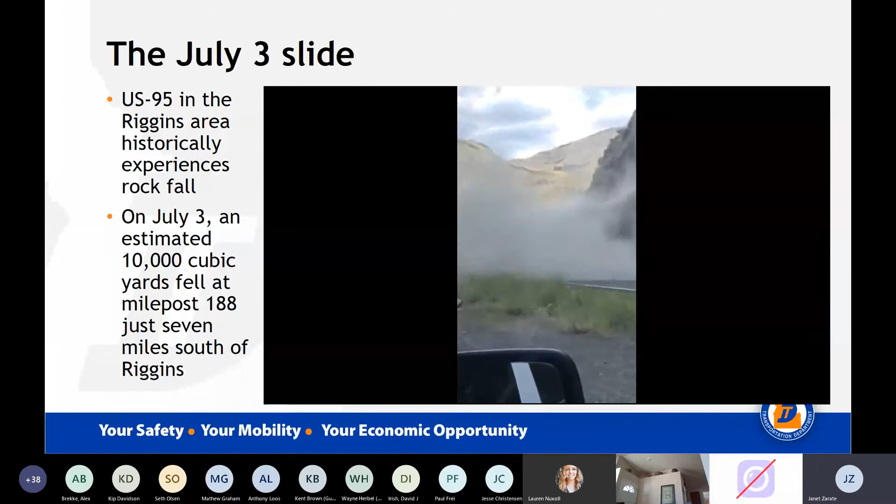Oh my gosh. Jesus. Oh crap. This is not going to come.

That's the understatement of the year there. So thankfully, on the July 3rd slide, and we'll talk about the July 10th as well, nobody was hurt, and that's pretty incredible footage of that slide.

Thanks, Janet. So what we have here is a metamorphic intrusion, basically composed of a greenstone that is typically called serpentinite or serpentine type rock, and it's interspersed with about 4 shear zones. Along those shear zones, you'll find a schistose type rock. And this rock outcrop is about 250 feet high, about 800 feet long.

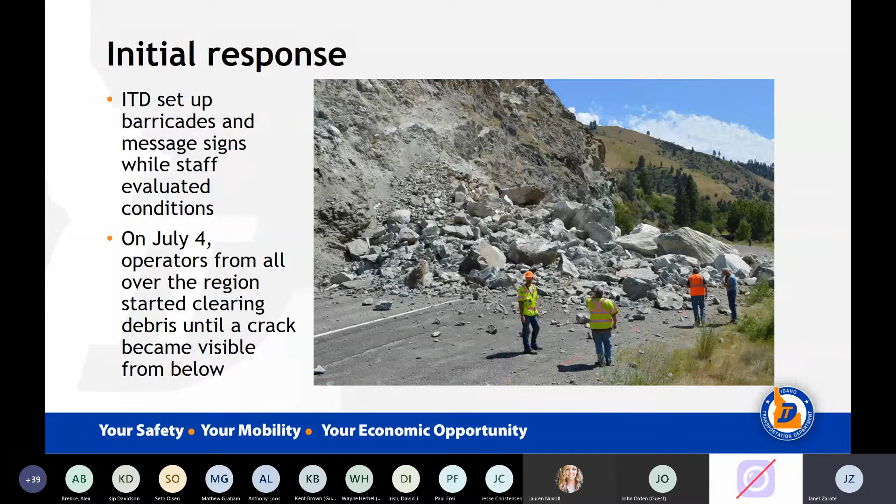We also faced the challenge of rounding up folks over 4th of July weekend to get operators out all over the region to start looking at the debris and formulating a plan. But one thing that we had to do before we could start the work is make sure that we could do it safely. And that was critical, getting McMillen Jacobs out to be able to assess the slope. We also mobilized David Evans and Associates to put targets on the slope and begin a monitoring regimen. We had ITD spotters out 24/7 to watch the slope and make sure once we got operators lined up and construction happening that we could do it safely.

So here's some pictures of that work. Once McMillen had assessed the slope, we brought in 4 Connex containers that were 40 feet long. We used those to create a protective berm and opened a shoofly that was just 1 lane. It was ready on July 5th, but we still were getting comfortable with the slope, assessing the information that we had available. And so we waited to open to just one-way traffic during daylight hours until July 8th. And then as Bill hinted at, we started to see some movement. So we closed the road on July 9th, but we'll talk a little bit more about that later.

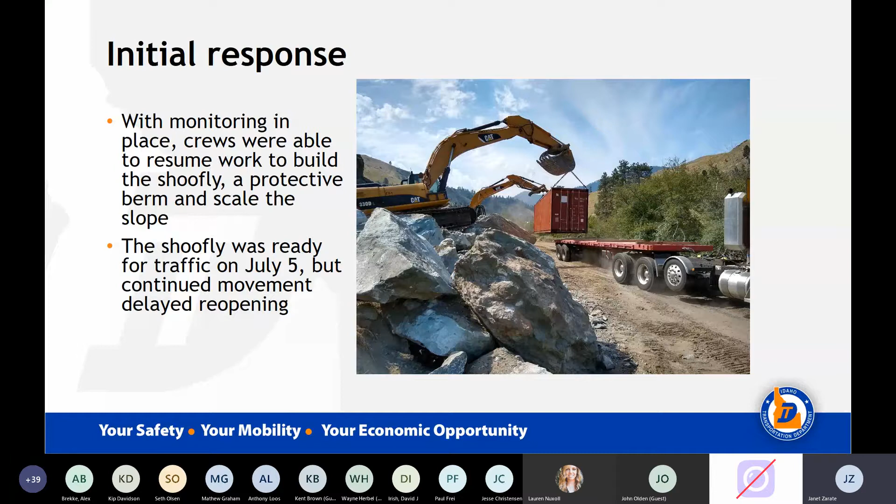So initially on July 5, actually Brian had a crew that was already on contract, TripTech, to come out and do some scaling. So we got on the slope with TripTech on July 5, or correction, July 6, and started evaluating the slope. So basically what we're doing is safety scaling, getting some of the major loose boulders off of there so we can safely evaluate the slope and also get traffic moving.

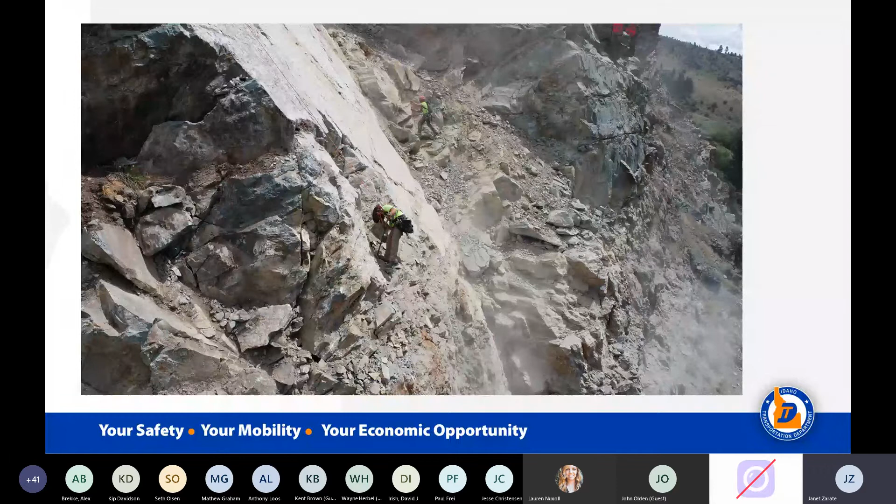So on July 6th when we got out there, you can see they got the Connex container set up, and they've got that shoofly operating. And one of the key things is when we got out there, I had ITD start opening up the ditch between the toe of the slope and that berm so we could have a bigger catchment zone. And you can see Jamie and I up there standing on the footwall below the tension fracture. Obviously we're on ropes, so it's kind of spooky out there still. We're looking at that tension fracture. Right there, it's about 5 feet wide.

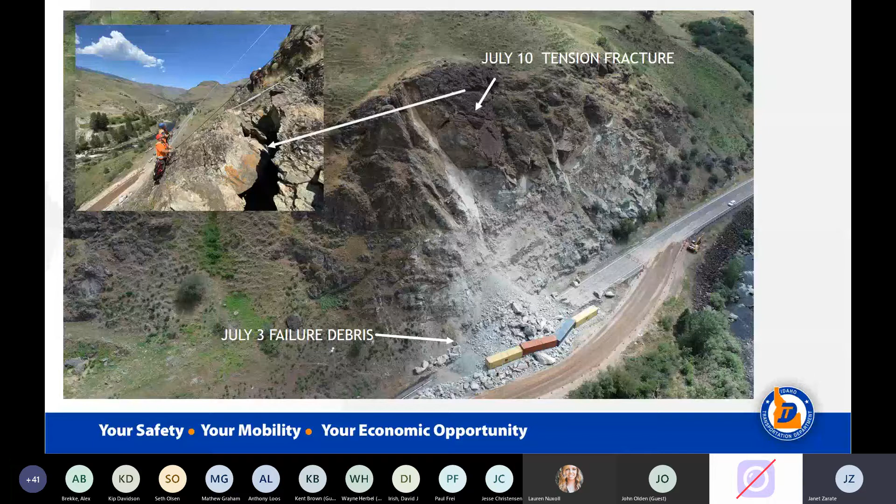What happened was during that period of July 8th, we got traffic moving. We started seeing additional increase in movement on the surveyed targets, and also the tape broke on the extensometers. I had them re-tape the thing, and then I get a call that evening that it broke again. And so after discussion with Brian and Doral, I said we need to close the road. So you sometimes wonder whether you're going to be a goat or a hero when you close a major artery. Fortunately, after we closed the road, it did fail on July 10, and fortunately nobody was hurt.

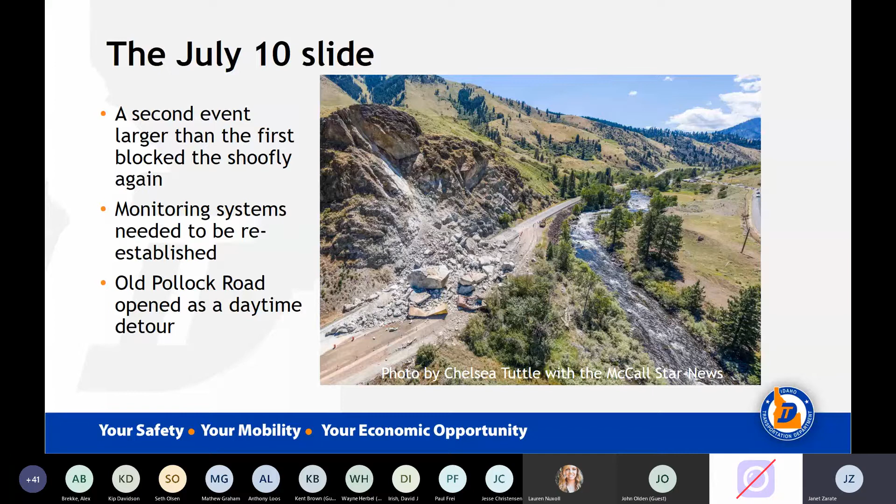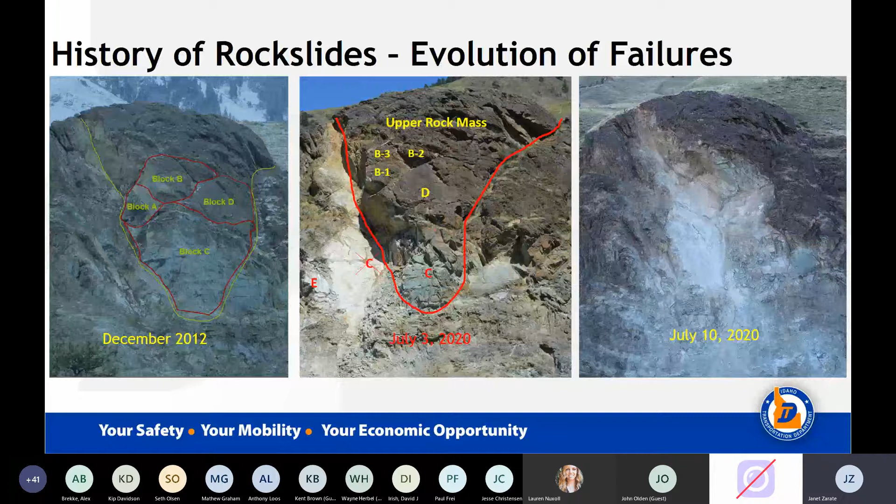But you'll notice those Connex containers look like tin cans. You just kind of mashed them with your foot. Now, one big block is probably block D that we labeled earlier up there, and block B actually broke down into 3, but it broke all the way along that tension fracture. You see that PVC extensometer above B3 is the one that broke twice on us. That's when we decided it's time to stop traffic and get this figured out.

So here's another view of that July 10th slide. The locals called this house rock because it was the size of a house. It was about 42 feet wide, 50 feet long, and an average of 23 feet tall. And the weight was about 3,500 tons. So we just knew it was going to be a significant effort to clear the road and reopen the shoofly.

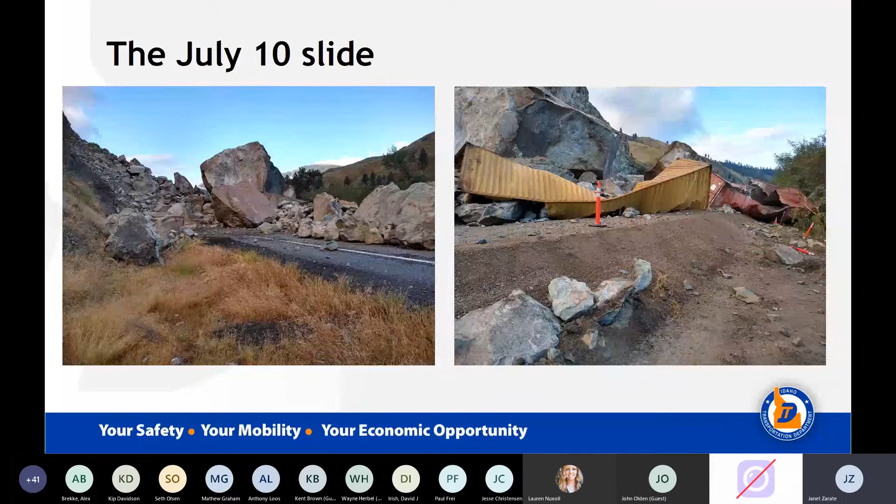Yeah, that big block you see, house block, is actually probably block D. And you look at those Conex containers, just mashed them like some big giant walked over them.

So another unique thing about the project is typically you don't look for a detour because of a rock slide and address a landslide, but that's what we had to do here on Pollock Road. And so Pollock Road had been closed for several years because of a landslide, and you can see in the picture below that's really not traversable.

And unfortunately, Google had this identified as a feasible detour. Thankfully, most folks in this area don't have reception, but we notified Google to take it down until we had made repairs and opened it officially as a detour on July 9th.

We worked with the local community because this is a quiet road that previously had been closed, that now was accommodating highway traffic. So it was opened only to daylight traffic, and we shifted those hours based on the needs of commuters and traffic demands in that area.

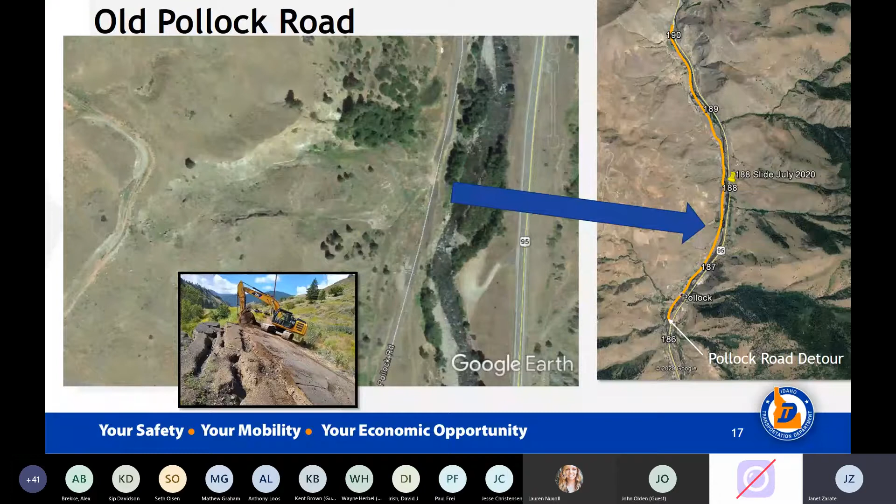So you can see the shoofly was open on July 27th. You might have seen blasting videos from clearing the rock and the debris. This time, instead of bringing in Conex containers, we built up a berm like Bill discussed before. This time we had a lot more material, so it was a lot bigger, and beefed up the shoofly so that it was able to accommodate 2-lane traffic.

At the beginning, while we were still developing and making sure that the slope was stable and had relaxed, we only opened it to daytime travel. And we'll talk about nighttime monitoring. One of the key things is that berm.

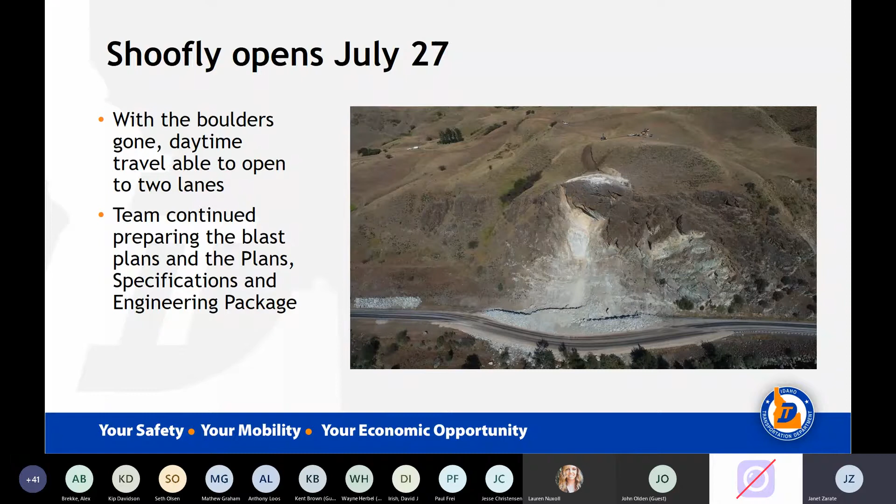So I had them working on both ends to increase the size of that berm and open up the catchment zone between the toe of the slope and that berm, because it was critical to catch a rock, not only when we were preparing to take that large rock mass out of the mouth of that chute, but eventually we're going to also be scaling that slope, and it works as a good method to capture that rock.

Now, what Janet was talking about, the big thing is we installed additional targets on the rock mass, but we also had monitoring 24/7, watching the slope. We moved all our survey points across the river so we could look right straight across at it out of harm's way. And at night, you say, well, what good is it watching at night?

Well, actually, with those lights, if you have any rockfall, it'll set up a dust storm and it'll look like a big cloud or starburst, and you can really see it. And also, it's quite eerie because you can hear the rock start to roll a little bit and such like this. So we had people sitting up there for the full night just watching this slope.

And we implemented an emergency protocol, and we had that in place earlier, but here's a good time to talk about it. Just so if our spotters saw anything at night, they could reach out to McMillen Jacobs folks and have them assess the slope. If it was critical to do an emergency closure, we had our traffic control company on call 24/7 to do that, put up a posting on 511. And so having all these safety measures in place just made it possible to open the highway back up.

So one of the key things is we have that large rock mass up there. That's 14,000 cubic yards, about 33,000 tons, basically. And we're going to be putting machinery on that outcrop. We're also going to be putting personnel. And so we were very concerned about monitoring movement.

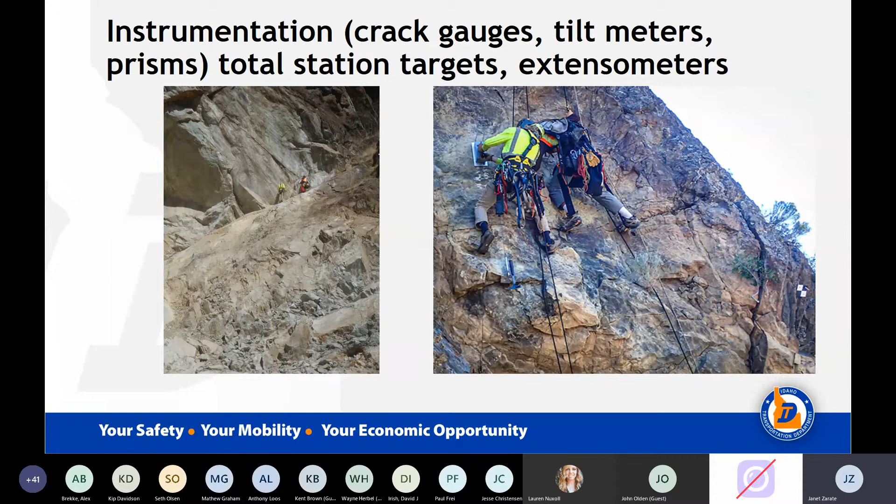And then we put additional targets, like you see on the right of that slide down there, that black and white, that's one of the targets that DA would shoot with their total station system. And we put new extensometers across some specific fractures that we were concerned about. The extensometers this time, I had them take a PVC pipe and then put another one inside of it. So the telescope, the one inside of it, would be painted red, and if it pulled out and we saw red, it meant stop and evaluate the slope. You could see that from across the site at our survey site.

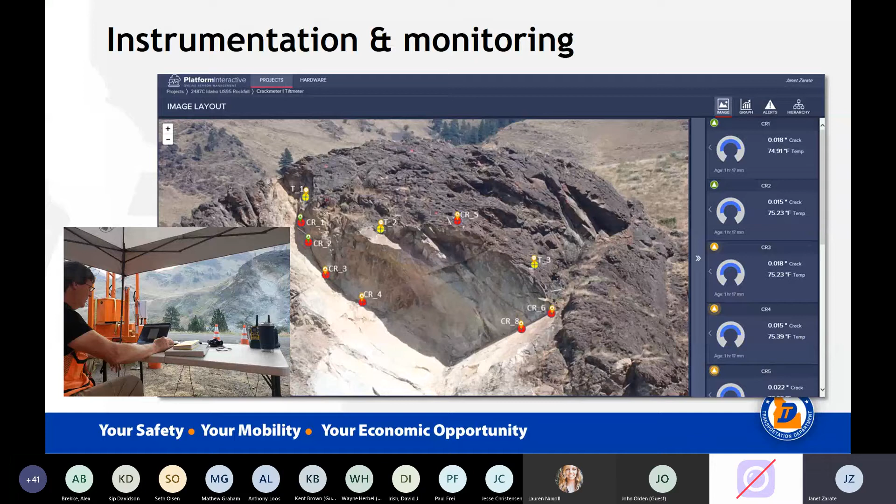And so every hour we'd go through all instruments. We'd check all physical surveying. We'd check the extensometers and stuff. And if we had anything that went astray on any of these, we'd immediately stop and evaluate the problem. The interesting thing is these would measure up to 1,000th of an inch, and you could watch the actual rock breathe during the day. As it got hot, you'd have changes in the movement of the extensometers and primarily in the tilt meters, and then they'd settle back down.

One of the key things was the communication, tying these into a cell phone. Now, Janet was able to get to Verizon. Verizon volunteered to bring out this repeater station on loan, with the understanding that we had some major fires going on in McCall and up in the Payette Wilderness area, and that it may be diverted to a fire. And so this was working great all the way up to about 24 hours before that shot. Jerry and I were talking with Janet and Doral on cell. All of a sudden, bloop, there it went, they moved the repeater. And so Jim Struthers used his ingenuity and was able to work with Superior, and we got on their system that controlled traffic lights, and we were back online in about 2 hours to continue the monitoring.

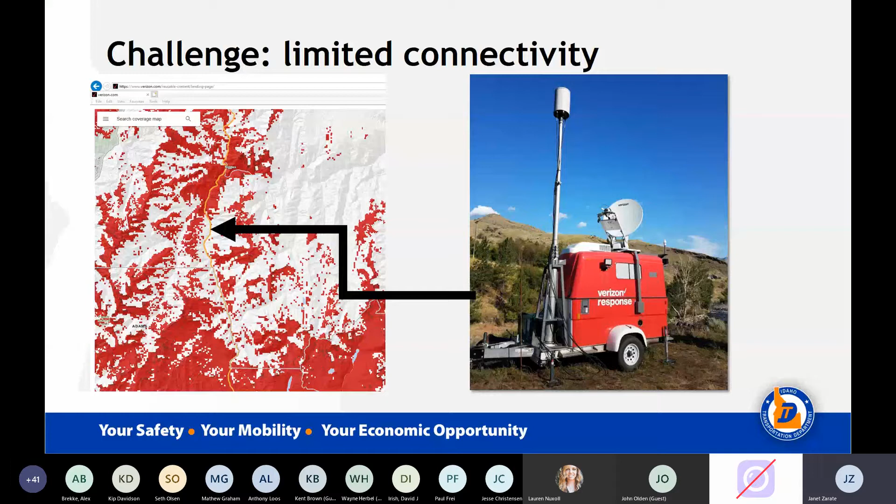Because the beauty of the telemetry, we could run this 24 hours through the night, whereas the total station was only daylight shots. And the nice thing too, for assurances and opening the road, whenever data wasn't received, the McMillen Jacobs crew would receive text message alerts notifying that there was a problem, that data wasn't being sent from the slope. So there were multiple security measures to make sure that we actively were monitoring the slope.

This is a picture from the top of the slide looking down on the drill rig. So alongside implementing all these safety protocols to successfully and safely do the work for the contract, we were putting together the plans, provisions and specifications for the slide mitigation project. So the PS&E package was ready for advertisement on July 24th. And just a reminder, the original slide occurred on July 3rd. So it's a pretty incredible time for the team to come together and put together a package for bid.

One of the key things to look at here, you'll notice we got 2 drill rigs sitting on the rock slope itself, on the mass, and we have the excavators carving a trail right now basically along where the tension fracture is. And so because of this, we were very concerned about movement with personnel and the rig sitting on there. And so this is the reason we spent $60,000 just in telemetry alone.

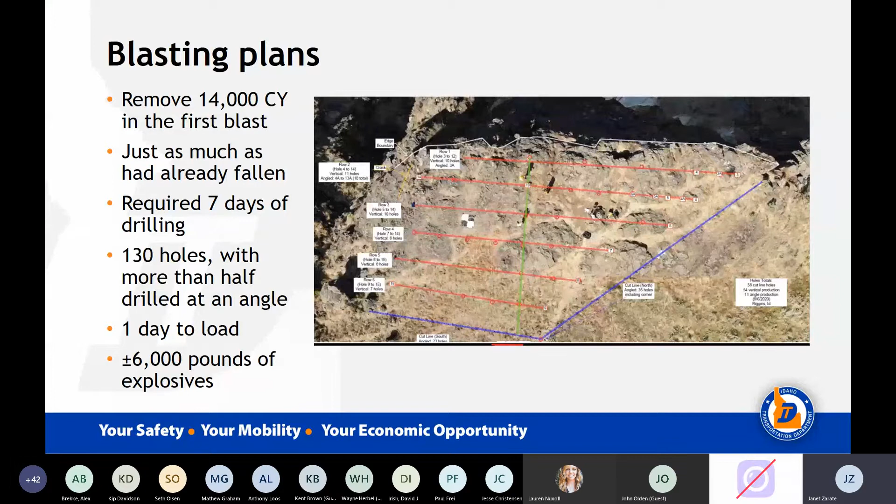So we had a crew on site drilling. We had some people from McMillen Jacobs up there monitoring and logging holes as they drilled, and we'd spend like 10 to 14 hours a day drilling these holes. But it was quite amazing. We got about 7,000 feet of hole drilled in about 7 days. It took a day to load, and we loaded about 6,000 pounds of explosive.

All right, just a typical cross section on the left, the typical blast hole. You'll notice we got a primer in the bottom, primer in the middle. We wanted to make sure that this thing shot, and so we loaded the hole based on Jerry and I looking at it. We talk back and forth. So, okay, let's load it this way.

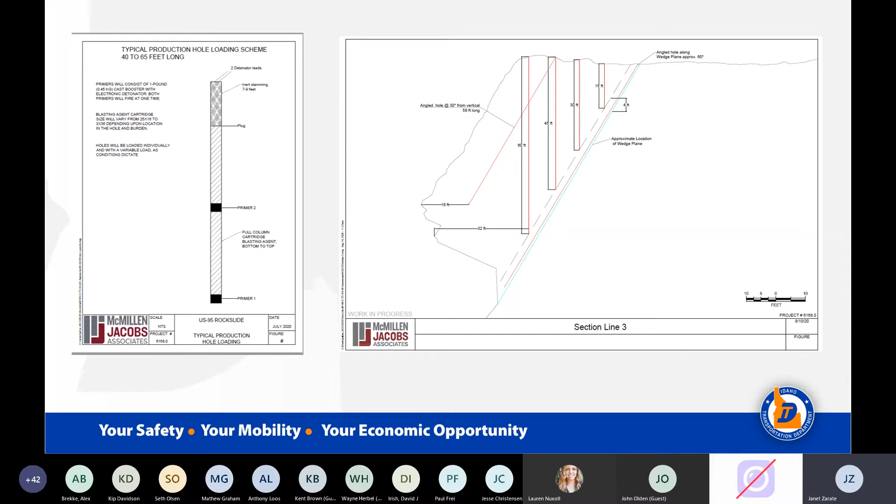On the right, you'll see the typical production holes. Those are subvertical holes, and then you'll see the trim blast hole or the cushion blast hole that's sub-parallel to the slide plane. So what we wanted to do is be able to shoot and lift it off of the rock mass or that slide plane, let it slide down into that catchment zone that we have created at the bottom of the slope.

So on your left, you'll see we're drilling that 60-degree cushion blast hole. Now this is a difficult hole not only to drill, but it's really difficult to load too and such. On the right, you see Jerry and crew loading holes. You'll notice Jerry and Ethan off, we're right on the edge there. It's about 250 feet down to the floor.

What we did, we had two crews loading, one loading the production holes. You can see Alexis there logging those holes. Carol Ravano logging holes for the cushion blast that's just off the picture behind us. After all this talk about blasting, we should go ahead and watch the video.

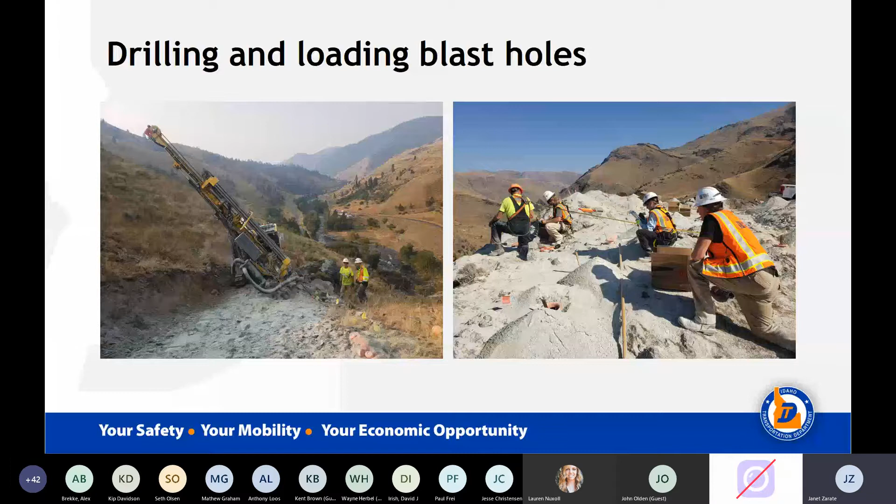So you can see the berm was in place to help contain material. DEA was out, and McMillen Jacobs took drone footage. So this is from DEA.

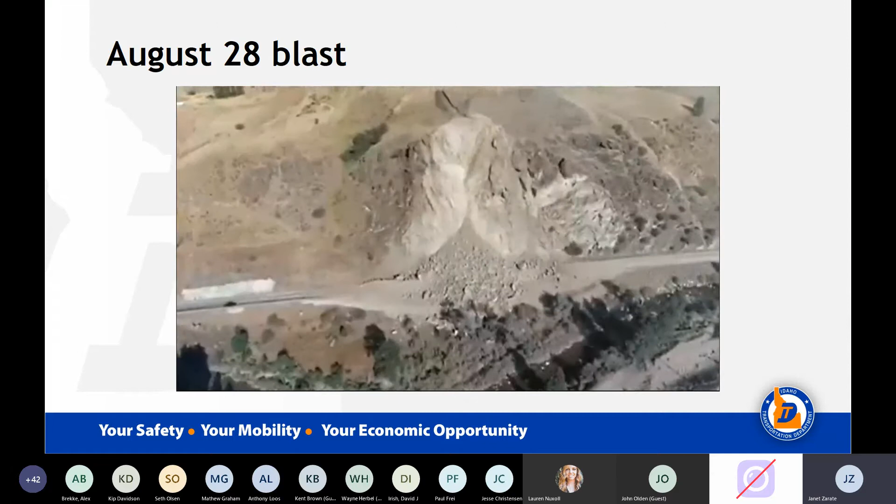One thing to keep in mind and keep fresh in your memory is the dust in that video. We'll talk a little bit more about air monitoring later on in the presentation. This project was unique because it had a $10,000 a day incentive to open 95. And Scarsella was able to open the road in 5 days in time for Labor Day weekend, so they didn't have any impacts to traffic over that weekend.

So first of all, this was a very technical shot, and thanks to Jerry's guidance on there, we had no rocks in the river; they landed in the ditch and on the shoe fly itself. In fact, we got very few rocks even in those tree lines there. So it was a very, very technical shot, but it was basically a perfect shot too.

So what happens now is after a shot like this, you've got to let the rock relax because the rock has been under a lot of stress, and so you just relieve the stress. So we let it rest and relax for at least 2 days. Once the 2 days were up, we got scaling crews immediately in. Now it was Rock Supremacy with Scarsella Brothers up on the slope.

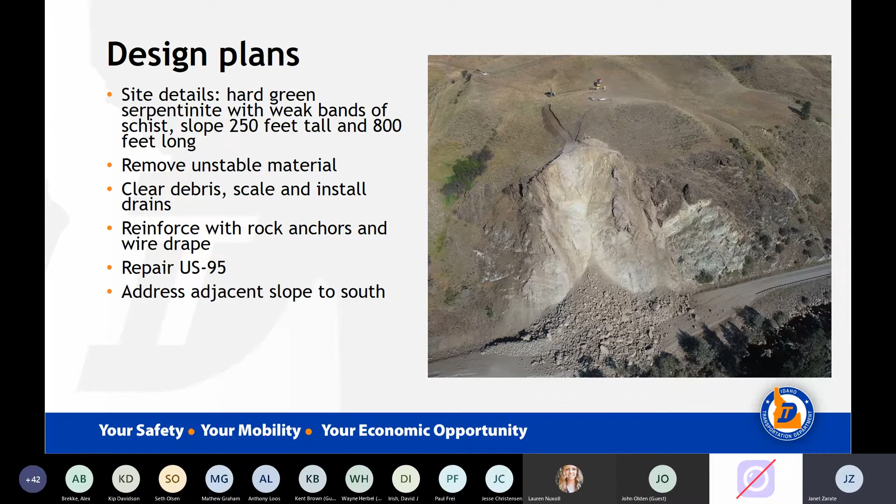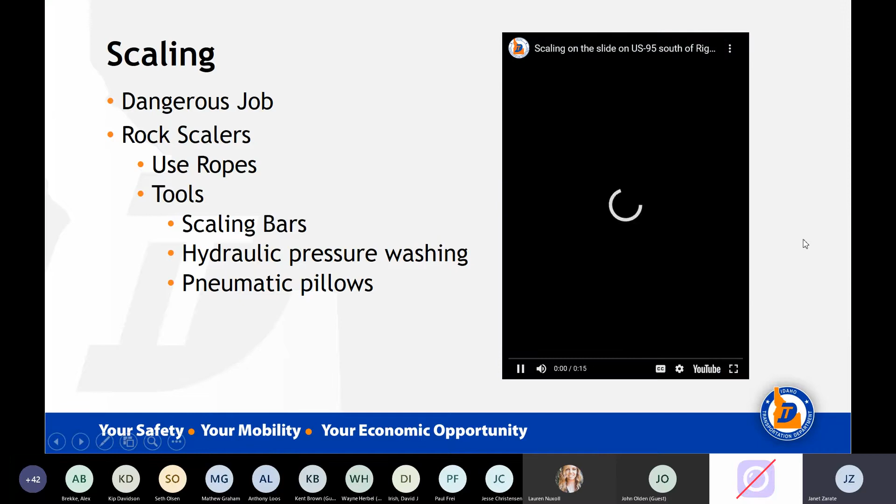Now, scaling is inherently a very dangerous job. And these scalers typically are on ropes, using scaling bars or pressure washing or pneumatic pillows to bring the blocks down. That's Ethan Guzik there. He's watching one of their blocks come down.

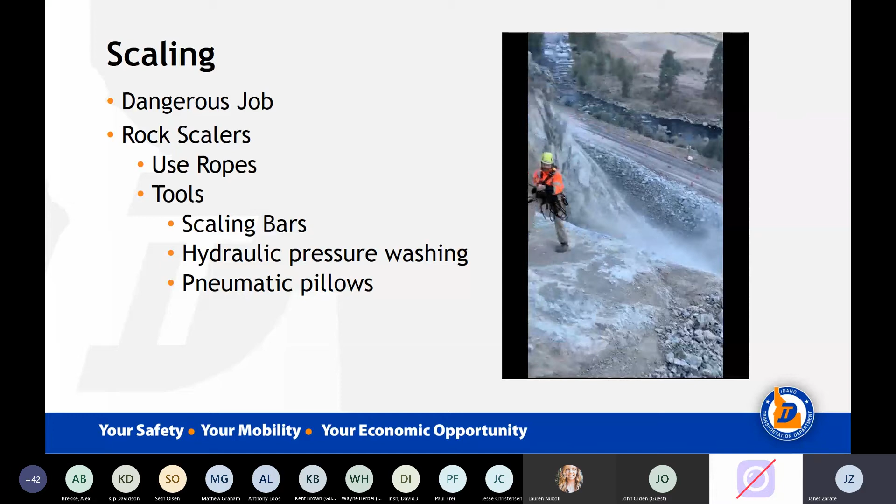You'll see that that ditch works perfectly. Just about 98% of our rocks that are kicked down when we're scaling stayed within that catchment ditch. And so that's what's really important, to have a good catchment ditch at the toe of your slope.

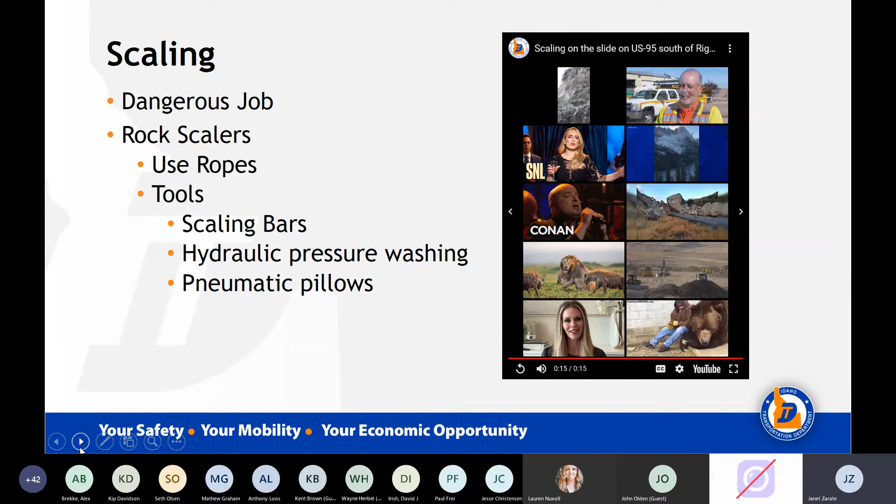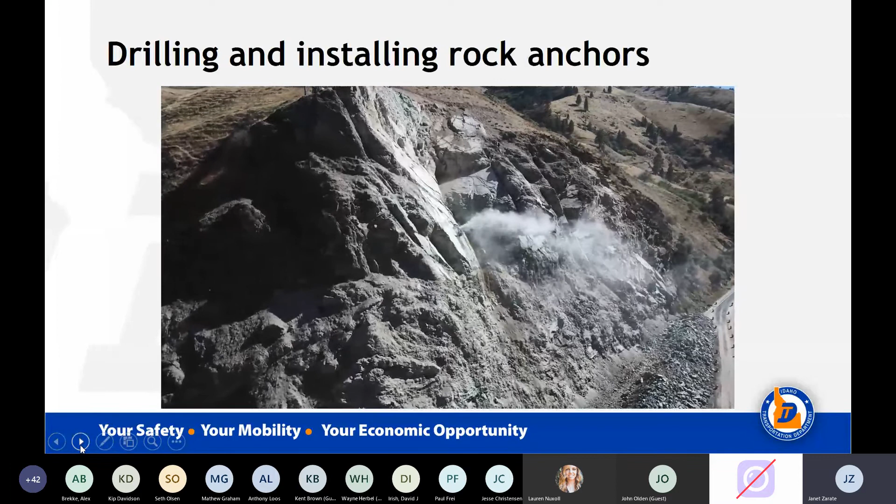Now, the drilling is done by a wagon drill. These wagon drills are lowered on cables, and you'll have an operator, a driller and then an assistant that's actually drilling the holes. So we're drilling the holes on the left. On the right, we're actually installing the rock anchors.

These rock anchors, number 10 bar, weigh about 100 pounds a piece because they're about 20 feet long. Incidentally, we actually put in some 30-footers, so you can imagine the angst trying to get a 30-foot down there. Fortunately, we used a coupler to do that. But it's a very dangerous job hanging on these wagon drills. But that's the way you do it.

So where are we? So far, we're done scaling now. We've scaled about 1,000 yards of rock. We've actually drilled and installed over a mile of rock anchors. This includes the dowels, some rock bolts, and then also rock anchors for the upcoming drapes and TECCO mesh.

We've installed about 300 linear feet of drains so we can reduce that hydrostatic pressure behind the main block. We're getting prepared to fly a mission with a helicopter to install about 60,000 square feet of wire drape on the south end. And right now we're installing about 2,000 square feet of TECCO mesh at the mouth of that chute.

And the reason we're doing that is we discovered at the top we had these fluvial boulders, or alluvial river type boulders, that apparently were laid down many years ago when the river was higher in the valley. So we've got erosion, say 250 feet. And so this is an ancestral type riverbed. And these rocks are so rounded and they just go down like bowling balls down the slope.

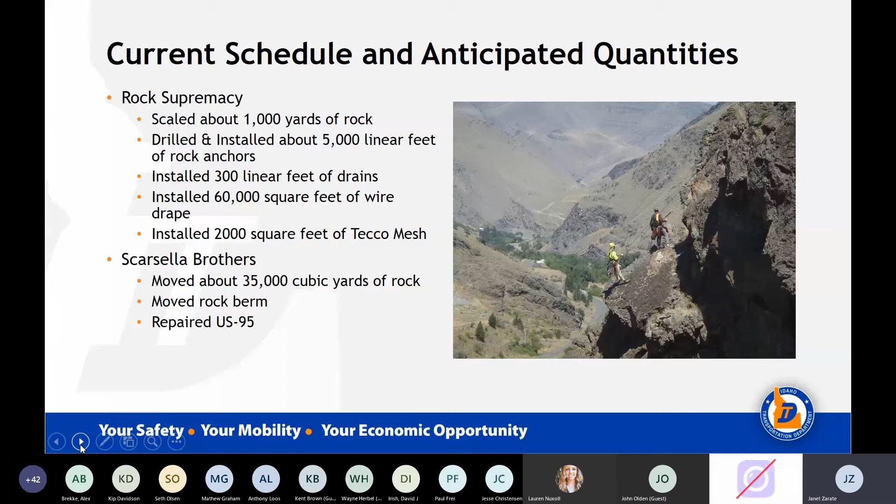So one thing I wanted to take the opportunity to raise awareness about that we encountered on this project is naturally occurring asbestos. Cody Stevens is a PhD student at the University of Idaho. He shared his thesis with us. He saw the slide on the news and let us know that his analysis had shown that there was naturally occurring asbestos as part of the rock of the slide.

And most folks, when they hear asbestos, they think of building materials. And there are some ways that they're similar, but there are some very key ways that it's different, that you need subject matter experts in the mineral form of asbestos, which we'll talk about a little bit more later on. But one thing I want you to keep in mind is that OSHA requirements apply for naturally occurring asbestos and projects in construction as well.

And they have 3 different classifications: none detected, less than 1%, and greater than 1%. And the key differences between those classifications are the extent of your monitoring, your training program, and how you can dispose of the material.

You know, one of the key things to understand, asbestos is just a general term. It applies to a lot of fiber type minerals. Typically, in this case, in naturally occurring asbestos, we're dealing with actinolite or tremolite. And with the serpentinite, that greenstone that Jim was sampling, that's typically actinolite.

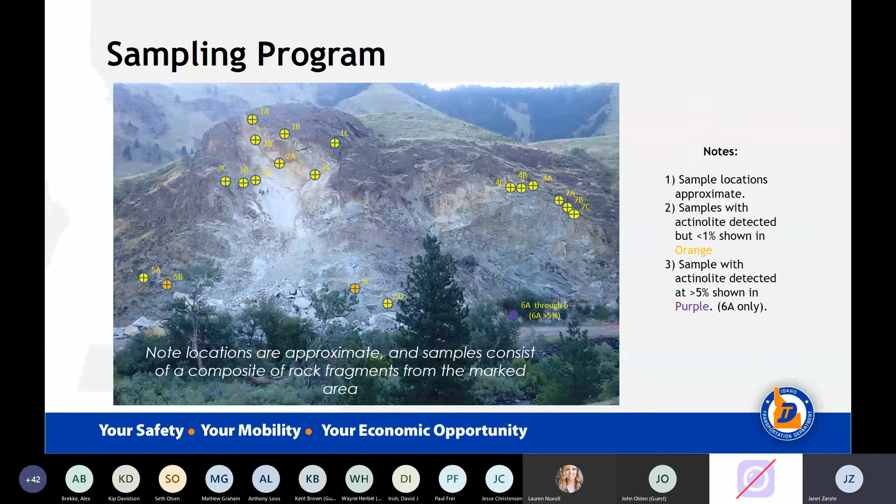Now we did find actinolite, but it was basically either non-detect or less than 1% in samples 1 through 5. And over in sample 6, we found one sample that had 5% actinolite, an asbestos type mineral. You can see that shear zone that goes along there, but fortunately, where that sample 6 area is, we could isolate that. We weren't going to be doing any digging there. It's going to be covered by a rock mesh we'll talk about later. So we just totally avoided that area.

So like Bill said, the key thing that we were able to do by taking this rigorous sampling and really characterizing the slope was to avoid disturbance of areas that had greater than 1%. That's the first thing that we did with the contract. And in areas that we couldn't avoid disturbance, we used wet methods to manage the dust from the project.

And because this is pretty new, at least to District 2, working with naturally occurring asbestos, we wanted to have good data about what methods were effective and make sure that we weren't exceeding OSHA limits and that we were taking the appropriate measures. And then the last thing to mitigate was to make sure that all the staff working on the project and the contractor had the appropriate training.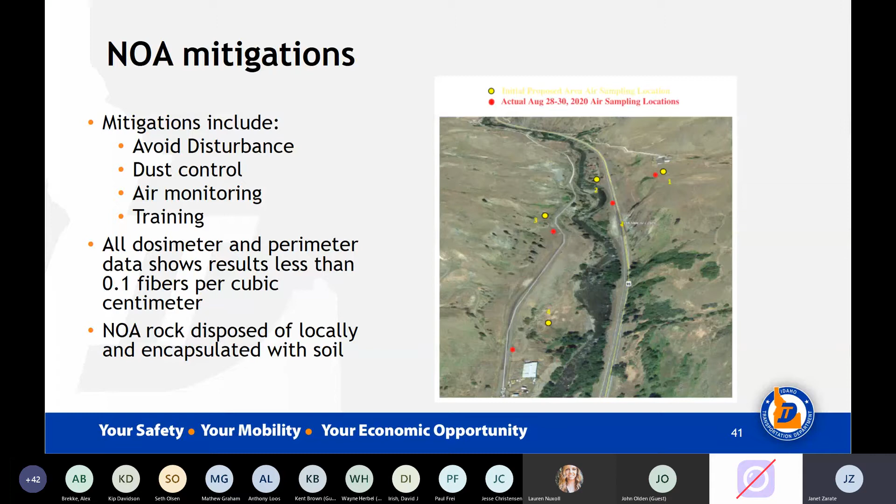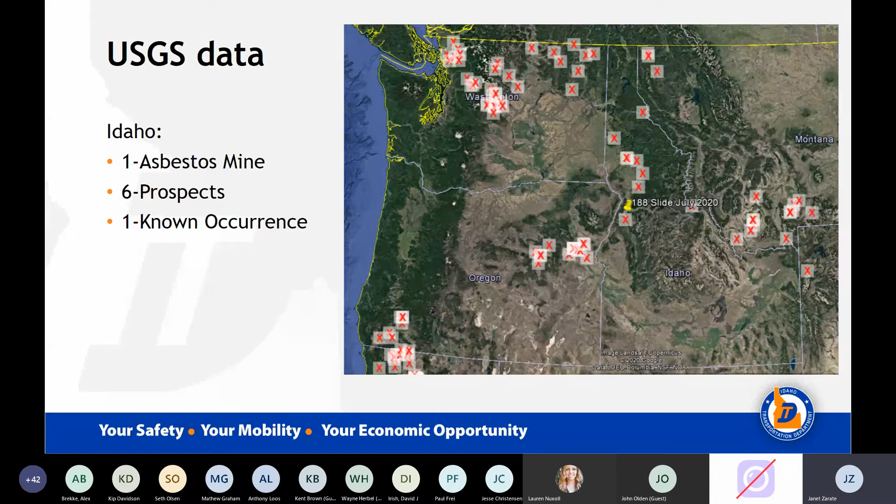It's not a project killer, but you need to take the appropriate measures so that you can do your project safely. I wanted to take the opportunity to thank Megan Saucer and all the folks who collaborated with us to have successful communication. Given the daily changes in the conditions, especially at the beginning of the project, it was essential to communicate so they could plan their trip and successfully travel the route.

So what did we learn? What do we conclude? Well, the slope is stable.

Typically, when you mitigate rockfall and stuff like this, you shoot for 90%. You know, you don't want to tell the public or anybody that you've got 100% containment, because you're opening yourself up for a lawsuit when the first rock flies down and misses your barrier. The second thing is you're never going to get to 100% anyway. You're going to have to expect, as the slope equilibrates over time, you're still going to have some rattling of small rock and such. That is typical.

So as Bill talked about, using a drone was really essential. It gave us more than just great footage for our presentation. It helped us communicate, develop the blasting plan, the doweling plan, so that we could share those images with the subs, the prime here in the office, to make sure we're all on the same page about the scope of work. It also gives you the opportunity to assess and analyze areas that are unsafe to access by other means.